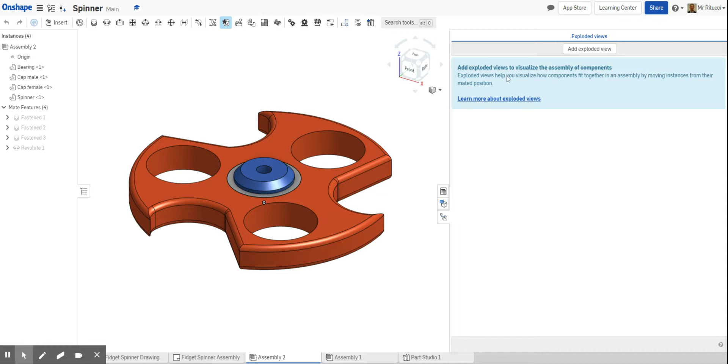So we have our product in the assembly, and to create it as an exploded drawing is pretty simple. To the right hand side here we have these little three menus, 1, 2 and 3. This one here says exploded views. We quite simply just click it, and what will happen is this menu opens up here. We can make it a little bit smaller to reduce the size so you've got more work area. All we do then is we just go add exploded view like that.

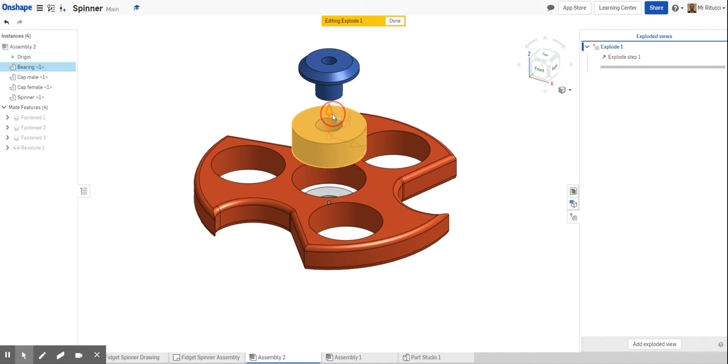What we can do then is you can select your part. For example, I'm going to click the cap here, and then I'm just going to click the up arrow to move it up and away like that. So that's the first one done. Then I want to do another one. So I'm going to click on here again and just repeat the process. I'm going to pull that up away from the drawing so I can see all the parts

of the drawing. What I can do then is with the lower one, I'm going to click here and pull that one down and away through the part there, like so, a bit further down. And then I'm also going to OK that one. And then I'm just going to do this final, just move the spinner down a little bit. Okay, like that. And whilst I'm doing this, I'm also trying to think of what looks good.

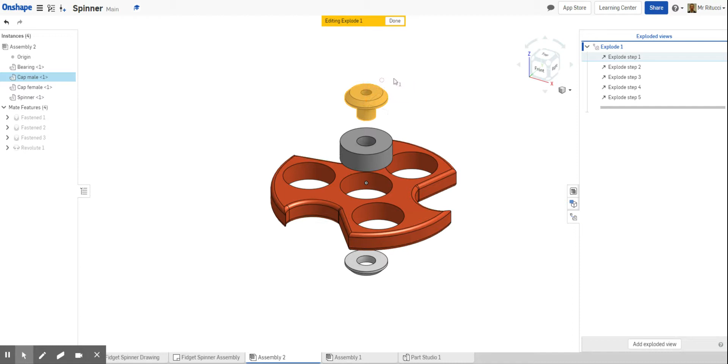Does it look about right? Do all those parts look like they're in the right place? Does it look visually appealing? Because this is a great way to present your work in a sketchbook or your final piece of work for your GCSE projects to show how things have been assembled. So I'm happy with that. Okay. Click the green arrow and then just click done.

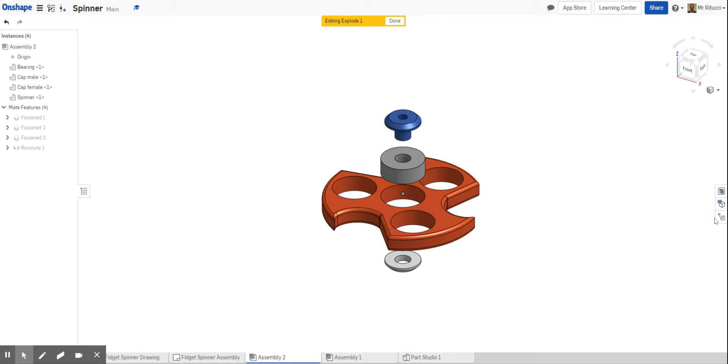Okay, and what happens then is whenever you go into this, it always diverts back to this, but you can click here and you can then also look at your exploded view by just double clicking that and it puts it into it for you. Now what we can do as well is we can then convert this into a drawing. So as we've done before with the assembly drawings like here, we can do the same thing, but we can do it as an exploded drawing. Okay, so again, that's quite easy to do.

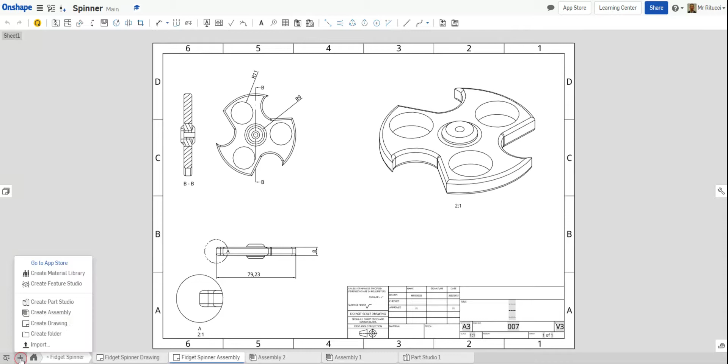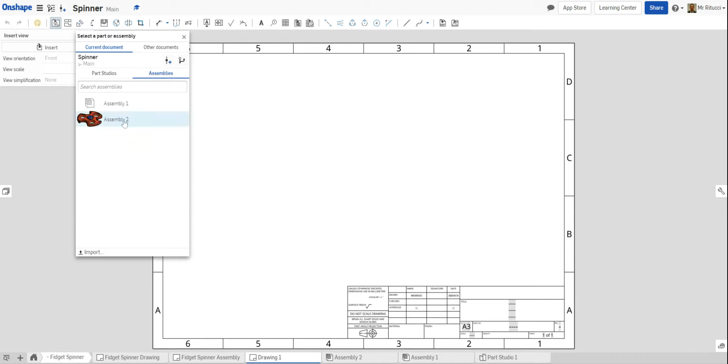We just go into insert new elements. We want to create a drawing. Now what will happen is Onshape will default to a previous template you've used. Remember, the ISO is the one we're using, A3 is the size. Click OK. And then it will open up our blank page. And it's a very similar process to what you did with engineering drawings. We have to go into the assembly. We want to insert the assembly. This window then is asking us, what do we want to insert?

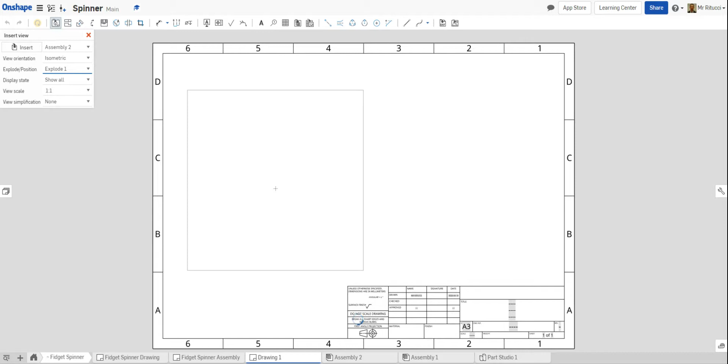Okay, so my orientation needs to be isometric, and the explode position, because we've created an explode, it will appear in here now. It needs to be explode 1. That will then allow us to show our work like this. If we want to, we could increase the size, maybe 1 to 2. Oh, sorry, wrong way around. We could go the other way, 2 to 1, just to make it a little bit bigger to fill the page. Where are we? 2 to 1, there we go. Like that. Okay, so we could pop that there. Just like that.

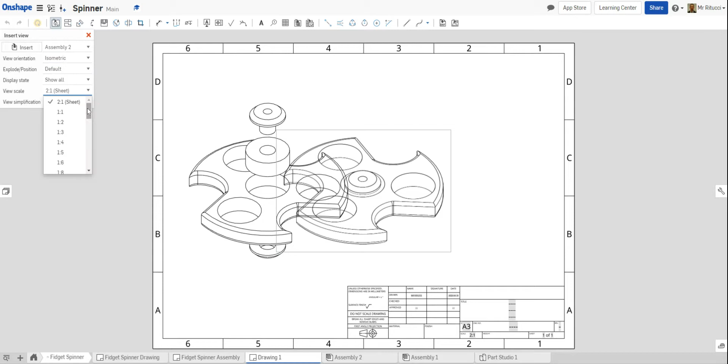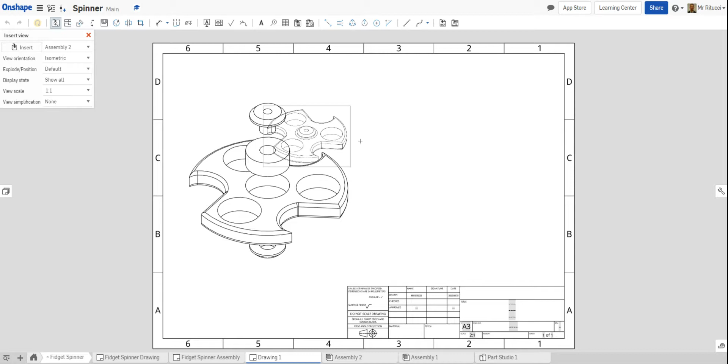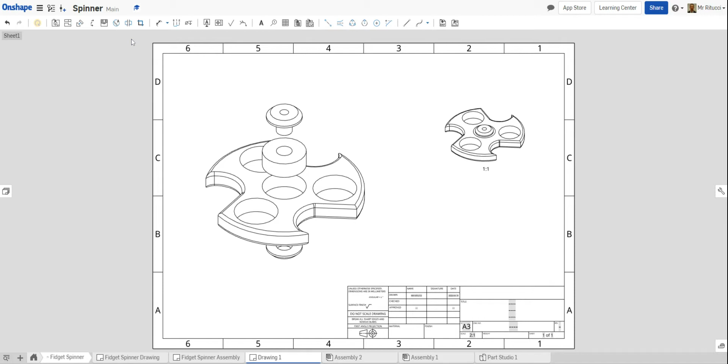like that. So then that is a really clear view of what our project would look like as exploded. It shows you all the parts. Again, in here, if you wanted to do any detailed views, you could. You could select an area, pull it out, and show a detailed view, but that's huge, which is going to be a bit too big. But again, you can add your detailed views in as you wish. Just a quick, very quick overview of how to do an exploded drawing.

Again, if you want to edit this information down here, remember you just right click and go to properties, and then you can edit it all in there as well. So that's that for today. Just a very quick lesson on how to do that.